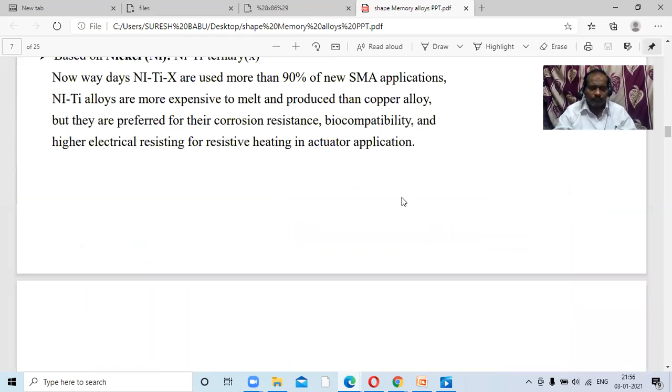Resume in the class, students. Due to technical reasons, the class was adjourned for 5 minutes.

Let us start. The advantages of SMA are very high power-weight ratio comparatively. Accessible voltage can accomplish thermoelastic transformation, higher strain recovery, higher strength, compactness allowing for reduction in overall actuator size, noiseless and silent operation, high corrosion resistance. So these are the advantages of using shape memory alloys when compared to the remaining alloys. That's what we can understand here.

So very high power and weight ratio is possible. Accessible voltage can accomplish thermoelastic transformation, higher strain recovery, higher strength, compactness allowing for a reduction in overall actuator size, noiseless and silent operation, and high corrosion resistance. So these are the properties. I think everyone knows the high power to weight ratio. That means basically the component is going to have less weight, but it is going to produce high power.

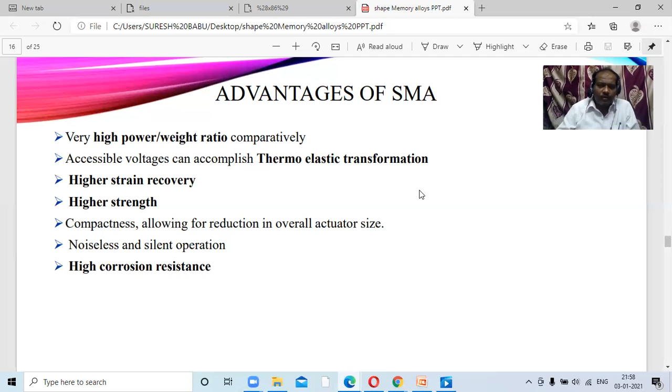Thermoelastic transformation is possible. Higher strain recovery is there. Higher strength is there, and compactness allowing for reduction in overall actuator size, noiseless and silent operation. Corrosion resistance everyone knows. Okay, these are important advantages. Next, limitations of SMA.

So heat dissipation needs a mechanism for cooling. That means for dissipation of heat. Why? Because we are already saying that when transformation temperature is reached, we can regain its original shape and size. That's why we should go for this type of mechanism. Next, less stiffness due to high flexibility.

Less stiffness. What is stiffness? The property which resists deformation when load is applied is called stiffness. Flexibility means, I think everyone knows, having a high nature to mold to any shape and size. So there is high flexibility for shape memory alloys. So it is a disadvantage. Why? Because it has to come to its original shape and size.

Relatively expensive to manufacture and machine compared to other materials such as steel and aluminum. Compared to steel and aluminum, shape memory alloys are going to have a higher cost. Next, most SMAs have poor fatigue properties.

Poor fatigue properties. What is the fatigue property? A property that is going to have high stresses and low stresses in a short time is called a fatigue property. If the fatigue property is poor, within less time it is going to fail its function. So that is the thing to remember here. So most SMAs have poor fatigue properties. That is, a steel component may survive for more than 100 times more cycles than an SMA element.

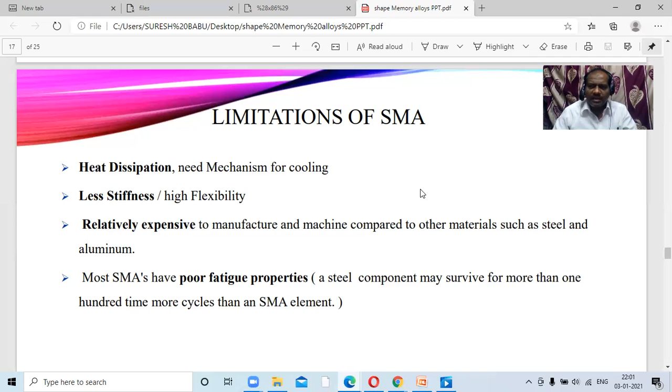So limitations, if you observe, heat dissipation should be done for a shape memory alloy. Less stiffness is there, relatively expensive. And the next one is, in terms of cycling operations, it has poor function. So this is another limitation of SMA. Next.

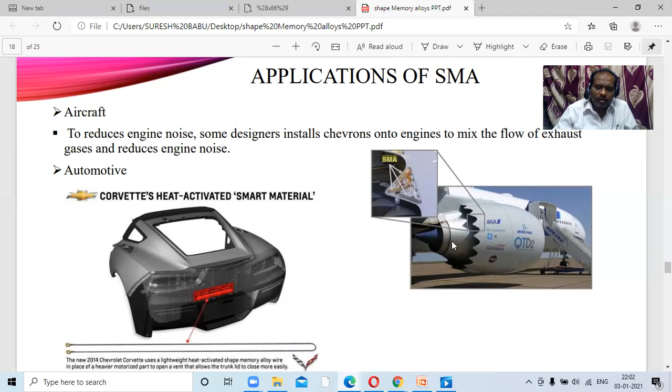Applications of SMA. If you observe, one is about aircraft, second is about the automobile. If you observe the arrowhead, we are going to observe the red color. Here also, if you observe the wings, at the wings we have a propeller. At the propeller we have an SMA internally fixed. That's what we can understand. So shape memory alloys have a very vital role in aeroplanes, or we can say aeronautical applications.

So if you observe this red color, this is a 2014 Chevrolet. Chevrolet uses a lightweight heat-activated shape memory alloy in place of a heavier motorized part to open a vent that allows the trunk lid to close more easily. So instead of having a heavy part here, they have gone for a shape memory alloy. Today, Chevrolet has gone for a shape memory alloy, replacing it with a lightweight part so that they are able to reduce the weight. The functioning is one and the same. So thereby the functioning of the component has improved.

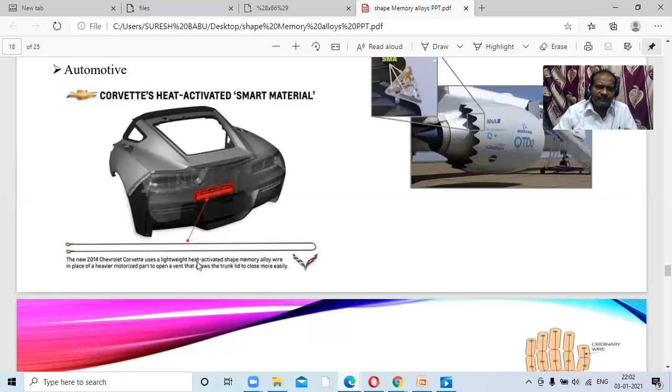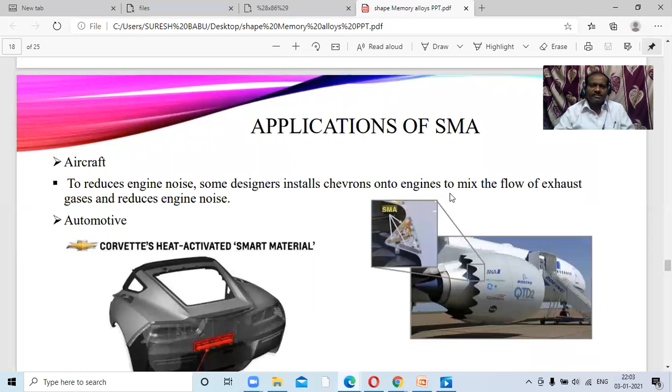These are only two examples I am referring to here. In terms of application, that means in aircraft and in automotive we can use it. In aircraft, wings are there. The main function here is to reduce engine noise. Some designers install chevrons onto engines to mix the flow of exhaust gases and reduce engine noise. To reduce engine noise also, we can go for these types of SMA alloys. Next,

in robotics applications, recently a prosthetic hand was introduced by Loh et al. that can almost replicate the motions of a human hand. That means a shape memory alloy was designed by Loh and others for a hand so that it will behave like a human hand. That's what they are referring to here.

In civil structures, SMAs find a variety of applications such as bridges and buildings. One such application is intelligent reinforced concrete, IRC, which incorporates SMA wires embedded within the concrete. Instead of having steel rods or steel cables, they have gone for shape memory alloy along with the concrete. Another application is active tuning of structural natural frequency using SMA wires to dampen vibrations. For damping vibrations also, we can go for the shape memory alloy.

So broadly, how many are there? First, we have aeronautical applications, automotive applications, robotics applications, and civil structures. If you observe this diagram, a concrete column is there, an SMA rod is there, a steel rod is there, SMA bar and anchorage for a column. Next,

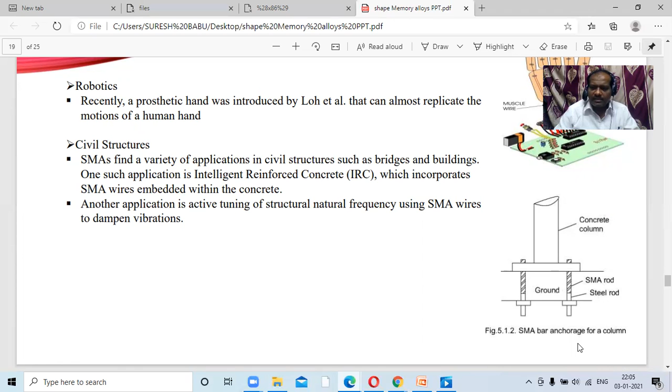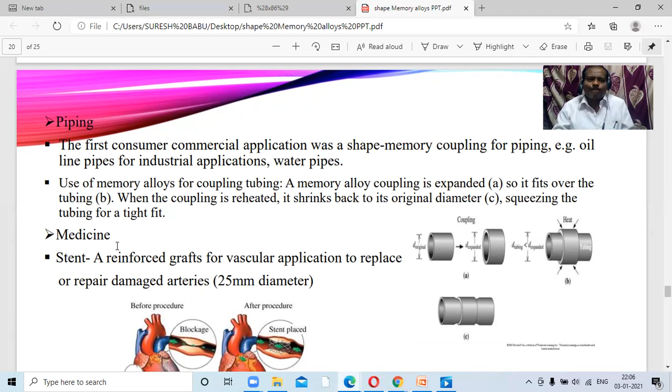Next, in medicine applications. In medicine, stents are reinforced grafts for vascular applications to replace or repair damaged arteries. The diameter is 25 mm. If you observe this one, in medicine applications also, shape memory alloy can be used in repairing or replacing in vascular applications, particularly these arteries. Arteries and veins carry the blood in two ways: one is sending from the heart and one is from all parts to the heart.

If you observe, this blockage is there. Here one example they have referred to. This blockage is treated with a stent placed. The stent is going to be our shape memory alloy, which has the ability to expand and compress. Here it is closed. So by using this one, it is able to allow the blood to pass through that artery. There is decreased blood flow, if you observe, due to this bulging. By using this shape memory alloy, we will bring it back to normal.

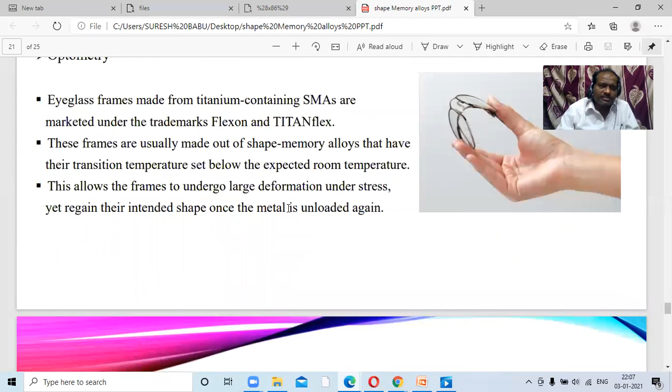So next, optometry. Optometry is another application; optics means glass. Eyeglass frames made from titanium-containing SMAs are marketed under the trademarks Flexon and TITANflex. Flexon and TITANflex are prepared with shape memory alloys. The frames are usually made of shape memory alloys that have their transition temperature set below the expected room temperature. This allows the frames to undergo large deformation under stresses, yet regain their intended shape once the metal is unloaded again.

So shape memory alloys are used in opticals also. While designing them, the transition temperature should be less than the room temperature. And the second point is that for large deformations under stresses, they regain the intended shape once the metal is unloaded again.

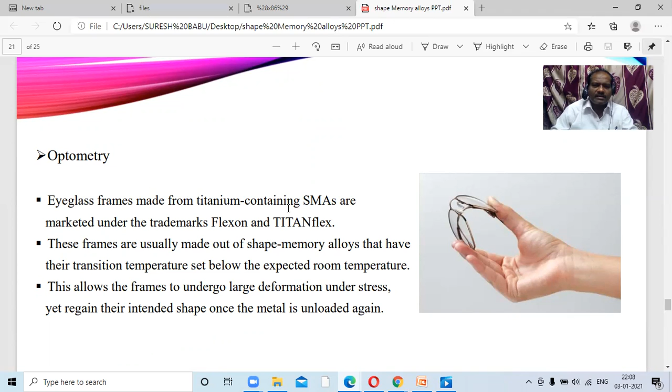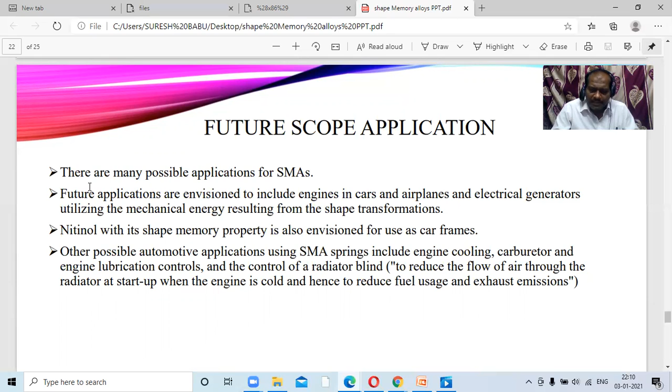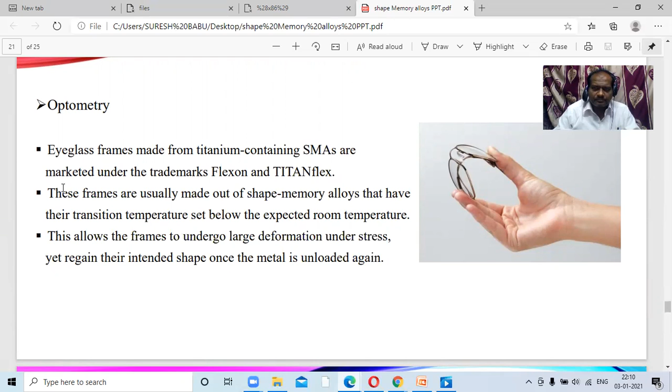So altogether, if you observe, there are a number of applications. As already told, there is aeronautical application, automotive, piping industry, civil structures, robotics, medicine, and optics also. So in total we have 7 applications for shape memory alloys.

So if you observe the conclusions, shape memory alloys have a bright future in the coming days. Second, they are currently used in a number of departments: robotics, defense services, aeronautics, and so on. Innovative ideas for SMAs and the number of products on the market using SMAs are continuously growing. Advances in the field of shape memory alloys for use in many different fields of study seem very promising.

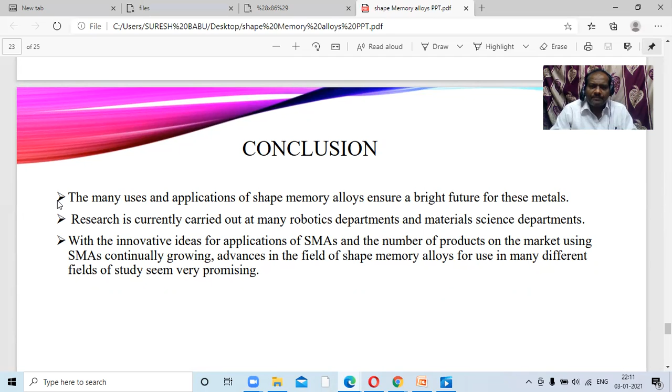That means shape memory alloys are a promising sector to do research work, to expand the business, to expand the manufacturing of products, because they have a very vital role in a number of applications. So these are the conclusions.

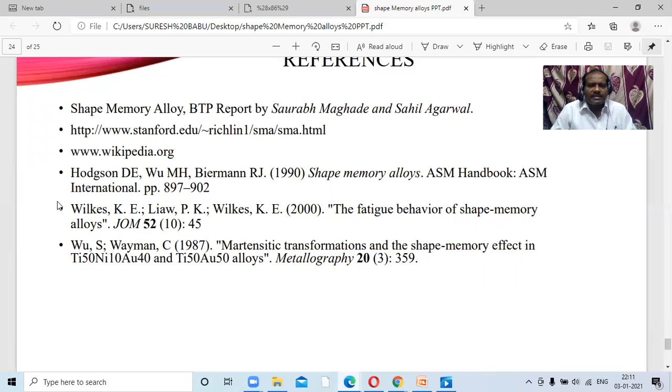The material is collected from the following references. You can have a glance at them. First, textbooks; Stanford.edu; Wikipedia. As it is a new topic, it has been collected from a number of sources.

Thank you, students. Before concluding, I want to explain the key points I have covered in this class. First, I covered the super elasticity behavior of a shape memory alloy. Second, applications of shape memory alloys. Third, conclusions on shape memory alloys.